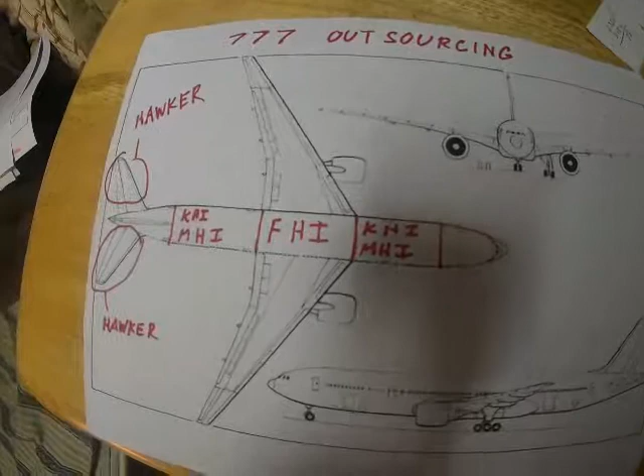But here's the thing. This is a diagram of the outsourcing, as you see. In fact, I'm going to lay this down here, and I'm going to use this camera to show you how it is. Okay, now you see it. I labeled it 777 outsourcing, and then I labeled the bird.

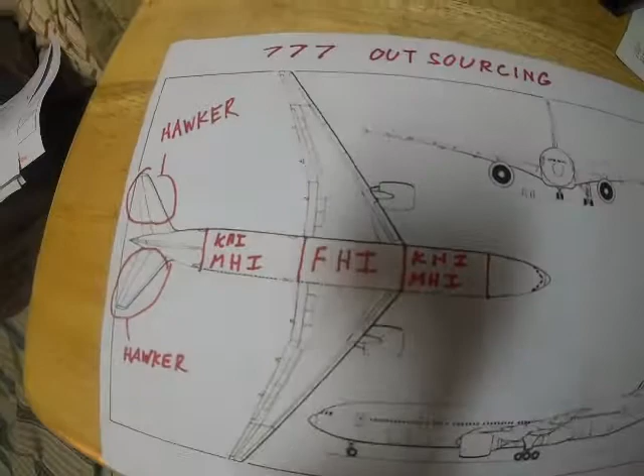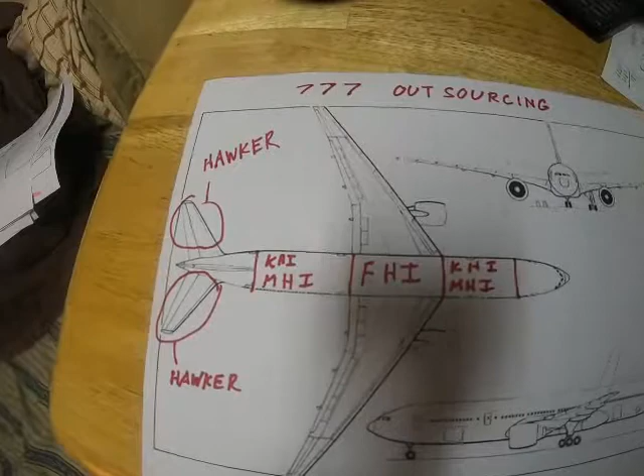You see KHI and MHI on the sections fore and aft of the center part where the wings are, and I labeled FHI. KHI stands for Kawasaki Heavy Industries. MHI stands for Mitsubishi Heavy Industries. And I got the shadow over the image. But FHI, the center section where the wings join the plane, were made by Fuji Heavy Industries.

Now we got things like what they call the elevators or the horizontal stabilizers were made by Hawker Industries, famous for making the Hawker Hurricanes and the Hawker Typhoons during World War II. But they're now a descendant company of that, and they merged with some other companies, and amongst other things, they built the ailerons. So this had some serious consequences.

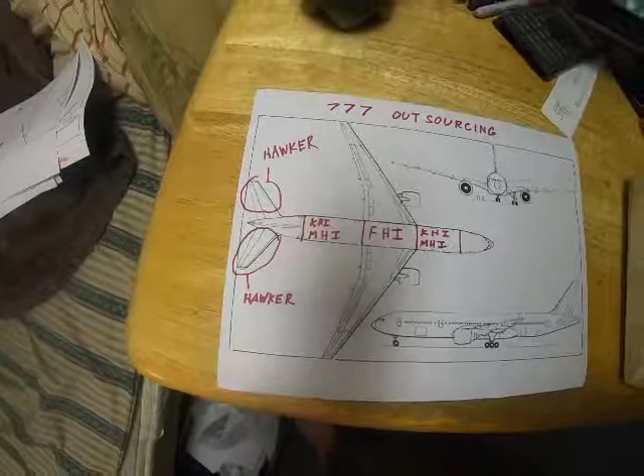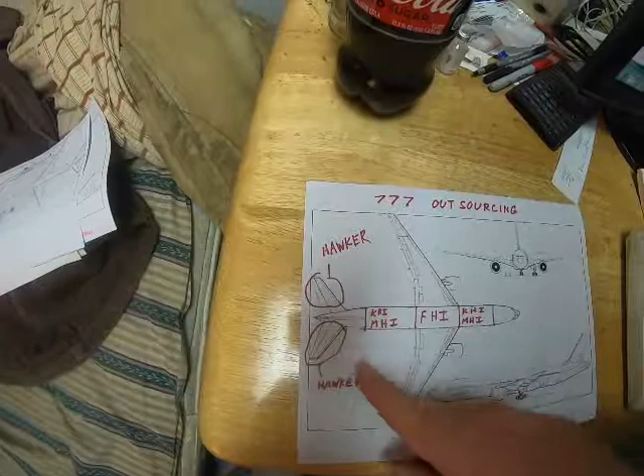As you can see, very little of the aircraft is actually made by Boeing. It's assembled by Boeing at the Everett plant where the 777s are assembled. But only this part, maybe the cockpit, most of the wings, but a lot of the parts on the wings are outsourced. And some of the tail portion, not including most of the tail feathers, although the vertical fin, except the rudder, is probably made by the company itself in places like Auburn, where they machine the parts, they machine the wing spars.

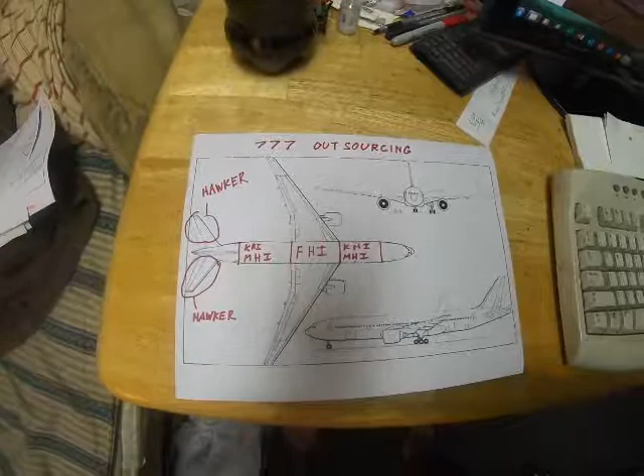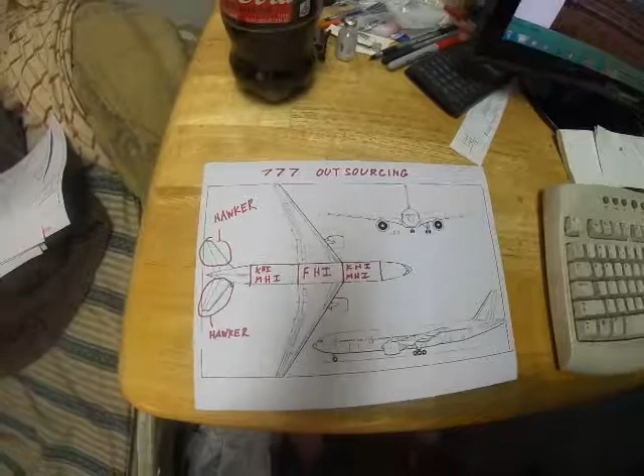But that's pretty much major outsourcing. Birds prior to the 777, you didn't have the entire body section outsourced to Japan. They were built by Boeing, mostly. A lot of the parts might have gone somewhere else, but the major structural parts were machined in Auburn and other such places, then used to assemble the birds.

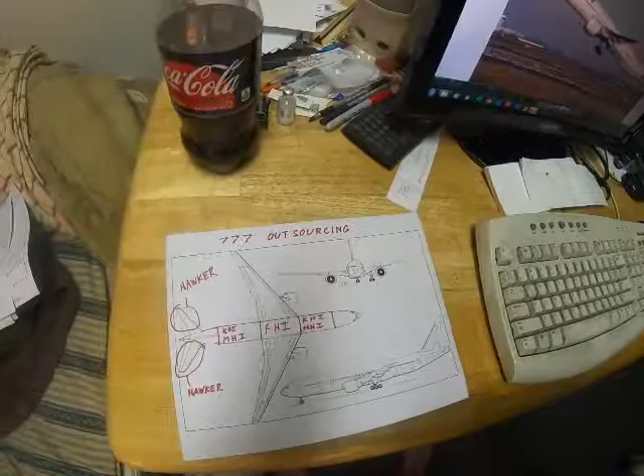So this is one of the things that happened during the 1990s with the 777. Now, I'm going to go back and tell you that the consequences was that I was an engineer assigned to the 777 project, but the work I was doing struck me as very boring and chicken shit work, essentially. But chicken shit that it was, it gave me a chance to look at the design models of pretty much every system on the 777 during the several years I was there working in Everett.

Now, why do I think it's chicken shit? Well, I was taught how to calculate force vectors. I was taught how to calculate stresses. I am familiar with such equations as stress equals mc divided by I. I'm a pretty smart guy. Yet in this job assignment, they made me feel like Fredo Corleone. I'm a smart guy, and yet I'm doing this crap, doing the work that pay code 2 type folks should be doing. And here I am, a pay code 4 engineer. So I'm pretty frustrated, and I didn't like that.

But why, then, were so many experienced engineers doing similarly chicken shit work? We're not doing the design work that we can sink our teeth into. And part of it is because the body section, which is most of the airplane, was outsourced to Japanese companies and to British companies, European companies.

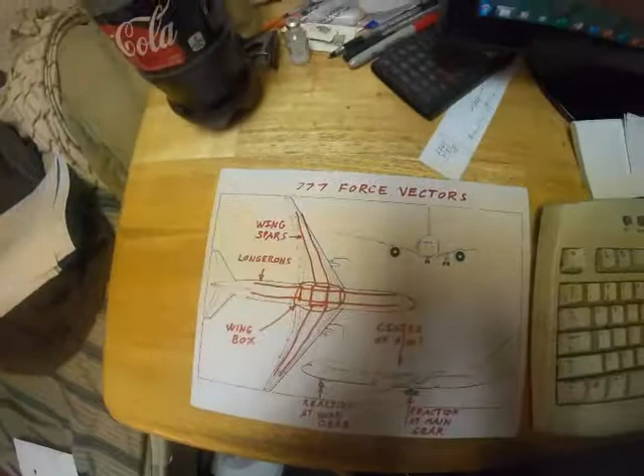Let me show you another drawing I made from the same print. Let's see, let me give you a look at this. I'll pop this so I can see it. Again, you see the force vectors.

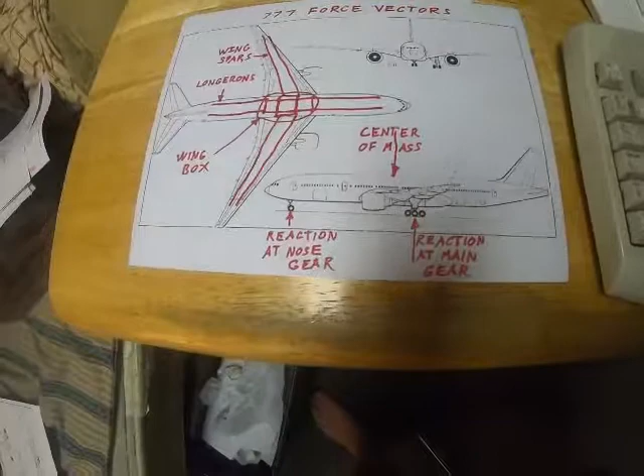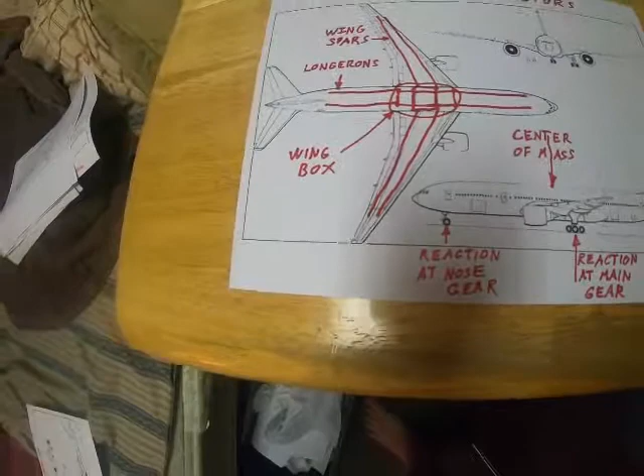Here you look at the force vectors of the airplane on the ground. The center of mass is a little forward of the wings. Underneath the wing box is the main landing gear, with a reaction at the main landing gear and a smaller reaction at the nose gear. This is why the main landing gear has lots and lots of tires, a big heavy thing, and the nose gear has 2 tires and is a little itty bitty thing. But the center of mass is a little bit forward, and the plane sits on the ground at a very level angle of attack. Now we look over here, and you see I drew in the major structural elements in this plan view of the 777 bird.

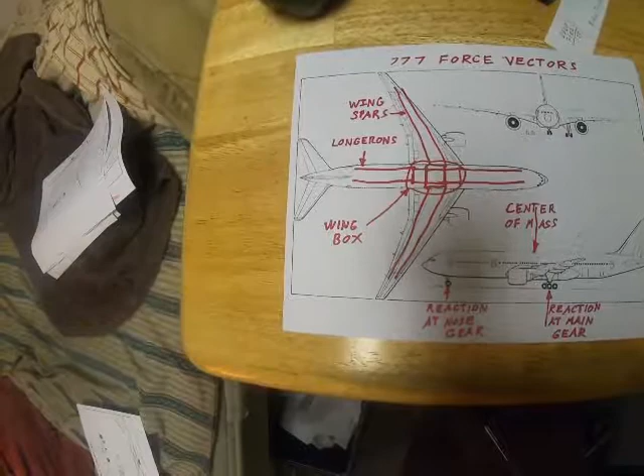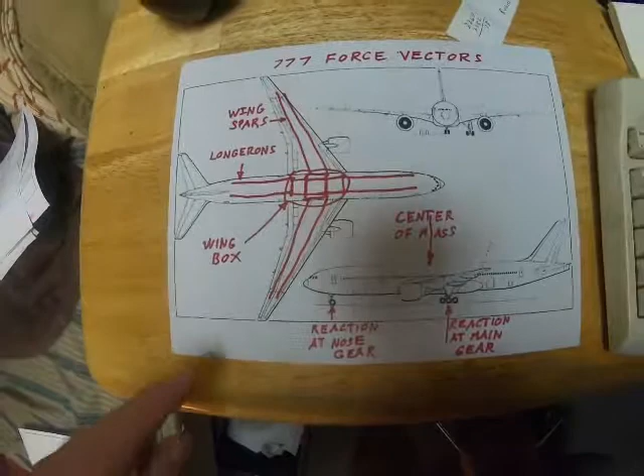This is typical of pretty much every jet age airliner, or large jet airplane since the 1950s, since the 707 project, the Dash 80. You have the center big structural part, the wing box, right there. You have the wing spars attached to the wing box, and they go out this way. And the longerons run up and down the body, at least as far as the rear pressure bulkhead and the main structural elements to which the tail feathers are attached.

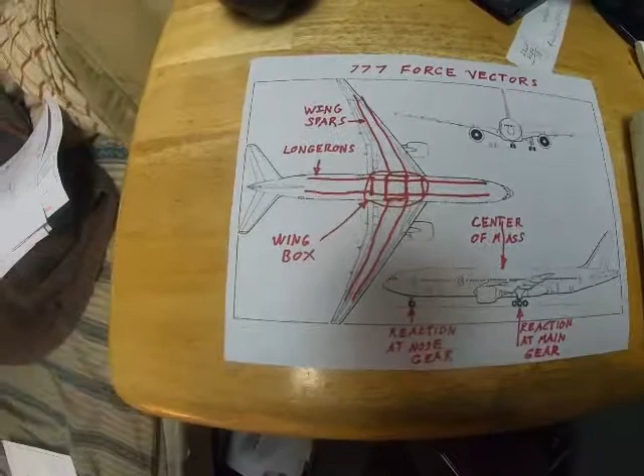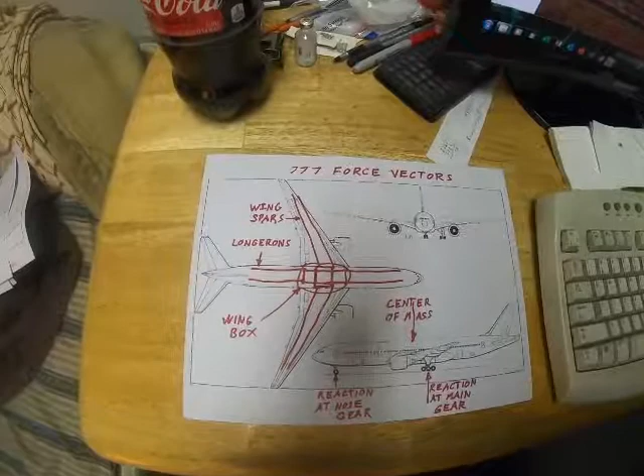So those are the parts. Well, here's the thing. When we outsourced the body sections, including the center wing section, to these Japanese companies, we outsourced much of the engineering design work of the wing box and the longerons. I repeat, Boeing outsourced much of the design work of the wing box and the longerons to these 3 Japanese companies, with Fuji Heavy Industries doing the wing box.

You're going like, what? But that's what they did. And I know this because I worked there at the time. And I saw all these computer type drawings, models of the various parts of the birds, including the wing box sections. And they were brought in from Japan.

And then we had to adopt that in, I believe, well, it's what they call the Dassault computer aided design. I forget the name of it right now, and I'll remember it one of these days. But it doesn't matter. It's a computer pre-assembly, digital pre-assembly type of thing.

And we got some improvements. The parts fit together better in the 777. But most of the engineering design work that a guy like me could sink my teeth into—calculate force vectors and calculate stresses and decide how big the fillet should be to avoid metal fatigue problems in the aluminum parts—that was outsourced. And it was Japanese engineers who did that work.